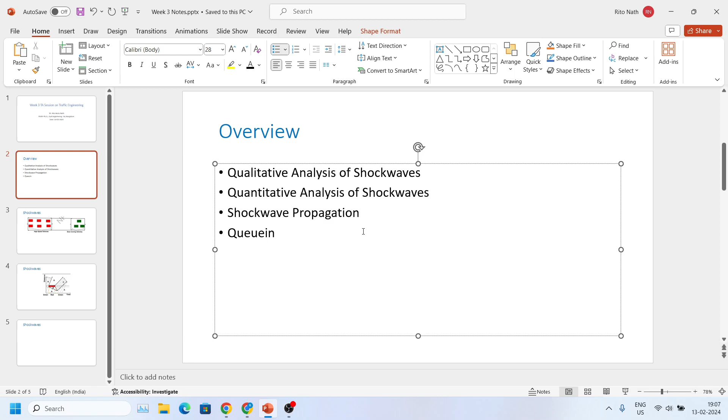So next is queuing analysis, and it can be both deterministic and stochastic. The stochastic version is not discussed in detail, and those things probably aren't required in detail to know, but just an overview is required for those topics.

Let me get started with shockwaves. First we looked at this picture which explains what a shockwave is. There is a stream of high speed vehicles moving behind a stream of slow moving vehicles. After a certain point of time, these high speed vehicles will catch up to the slow moving vehicles, and once that happens there are some states - the slow moving vehicles are in one state and this is another state. Once it catches up to the first traffic stream, a boundary will be created that demarcates some of the time-space properties of these two different states, and this boundary that's created is called a shockwave.

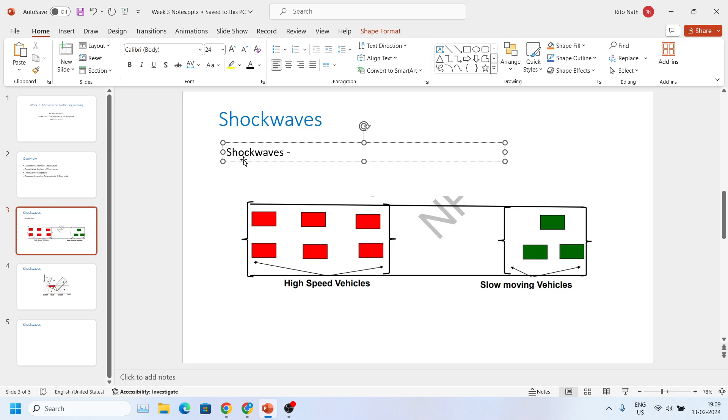So if I have to write briefly about shockwaves in a short sentence - let me increase the font size - shockwaves is nothing but a boundary that demarcates the time-space domain of one flow state from another.

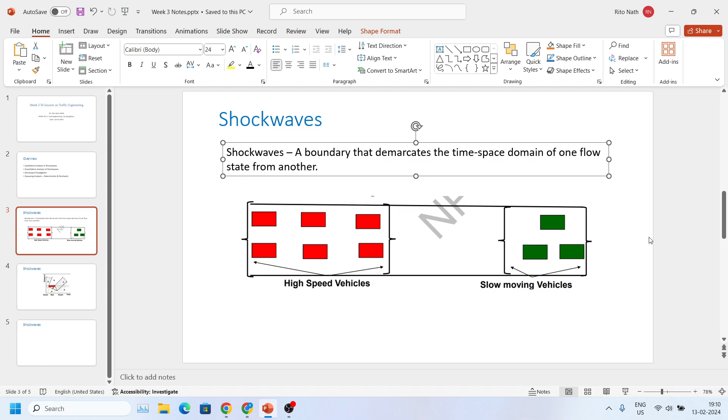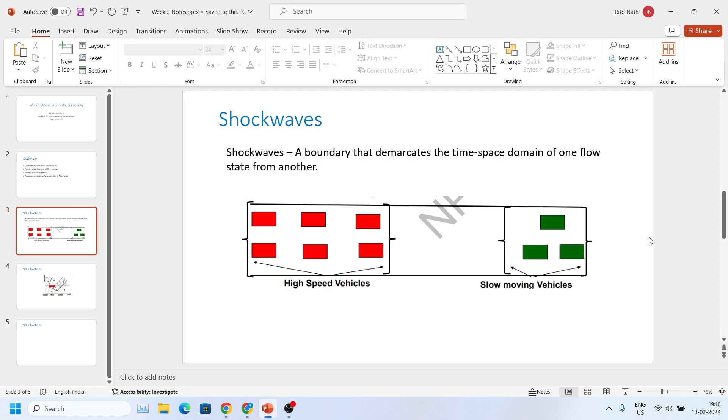This has already been discussed in class, and it's a very basic concept that you should be able to understand. There are some examples also given, like at a signalized intersection, if fast moving vehicles approach a queue, then queue behind those stopped vehicles, multiple shockwaves will be created - we'll see that in the next slide explaining the example discussed in class. So this is about signalized intersections.

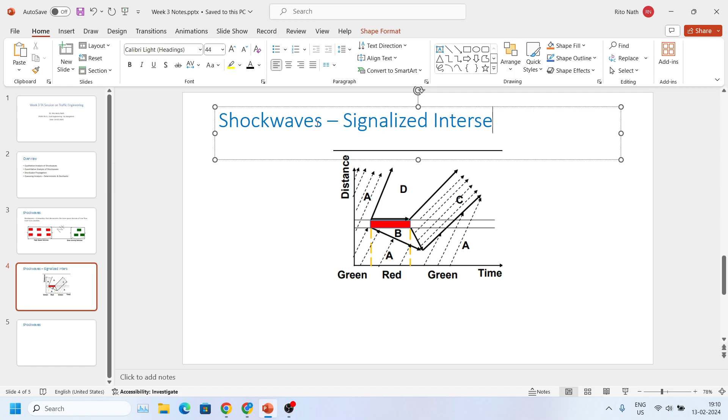Your first assignment problem, I think, is also related to this figure. At a signalized intersection you can have some green time, then your signal will turn red and remain red for a while, then again become green, and so on. In the x-axis time is plotted, and in the y-axis distance is plotted. There are multiple vehicles approaching that signalized intersection, and before it turns red those vehicles can pass through that intersection without any stopping.

But once the signal turns red, the first vehicle at this point, when the red time begins, has to stop there, and then behind that vehicle all the other vehicles will be stopped as well, and they will form a queue.

So that's why there is this boundary, or line, that has been generated, showing these vehicle trajectories as parallel lines. These parallel lines denote that these vehicles are moving at the same speed, and once it comes to a stop, this is the boundary that has been formed. Then after some time the signal turns green again, and the vehicles that approach after this point can pass as if it is the traffic state before the signal turned red.

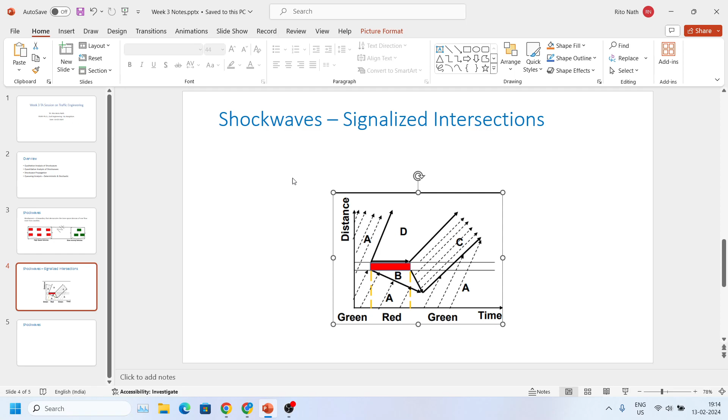Okay, so in this case, how many shockwaves are created? That's, I think, your first assignment question. Let me write it down. How many? So the answer is 6.

Now, what are these shockwaves? If I ask you, how many traffic states are present here? From the figure, you can notice that there are 4 traffic states. One is A, which is before the signal was red, when all these vehicles were moving at the same speed and passing through that intersection. This A traffic state was also prevalent upstream of the signal, and after the signal turned green again, those vehicles also had the same traffic state.

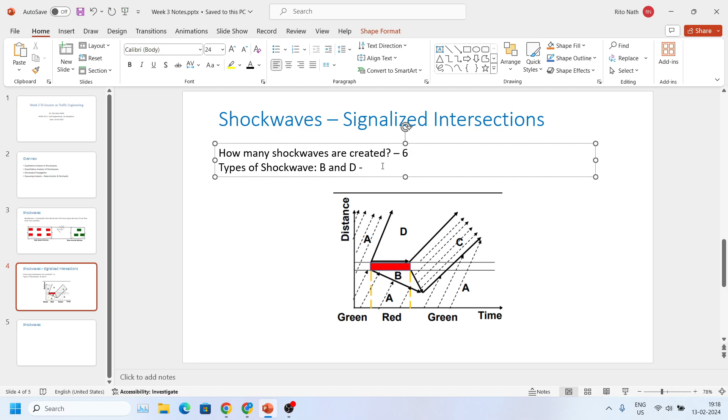Suppose between B and D, what kind of shockwave is created? If you notice here, between B and D, this is the stop line, and this is a horizontal line that you are getting between B and D. So the boundary is like that, and that's why it is called a stationary shockwave, generally called a frontal stationary shockwave.

Then, between flow states, suppose I pick... let me quickly check... so B and A is fine. Here, stationary means that the location of that shockwave is fixed - this is the stop line. Frontal refers to the formation of the shockwave at the downstream, what they call the front end or front edge of the congestion region. That's why it's frontal stationary. Next, there is something between A and B, suppose.

So this they call it a backward forming shock wave. If you notice, the slope of this line is negative. That's one way of checking whether it's backward or forward. It's backward because the queues are propagating upstream over time, in the opposite direction of the flow. And forming refers to the increase of the congested region as more vehicles come to this intersection.

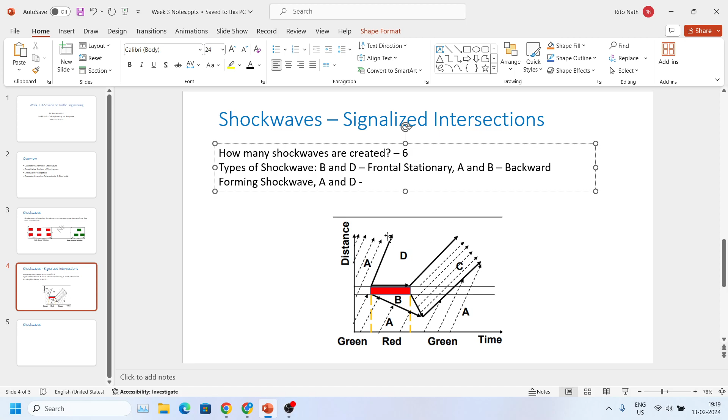So this is another type. Then we have 4 more types of shock waves. Next, between A and D, this is the one we're looking at here, and this they call a forward recovery shock wave.

And this is because forward means the shock waves are propagating in the same direction as the traffic flow, and recovery means the decrease of the congested portion because more vehicles are now getting dissipated.

Similarly, you will get 2 or 3 more shock waves, one between B and C. I'm referring to this line. Again, it denotes something related to backward, right? And this is called the backward recovery shock wave. Similar kind of definition - the dissipation of queue happens and so on. That's why it's a recovery shock wave.

And backward means these shock waves are propagating upstream of this red or the stop point. Then there is something between D and C as well. So I'm looking at this one, and this is called the forward forming shock wave.

So this means that this moves in the same direction of traffic, as you can notice, and as this flow state D has almost 0 vehicles here, the propagation of the shock wave will create some congestion. So that's why they call it forming.

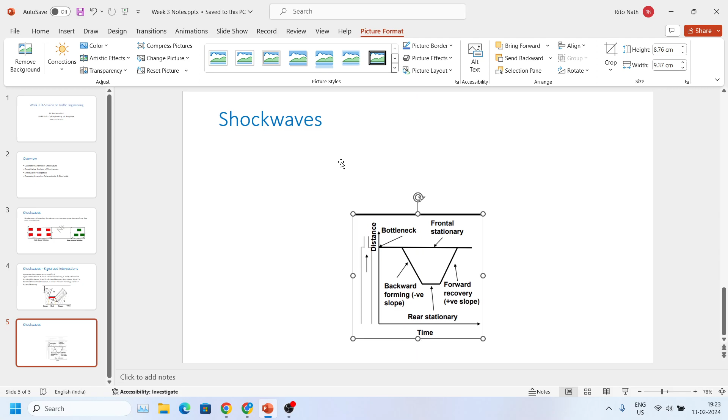Okay, so probably I'll move to that example. I'll just quickly add this figure. So here there's another example that I'll be talking about, related to the lane drop at a bridge.

So here, if you notice this figure, I think it's visible - I'll just increase it. So this is the lane that we're talking about, and it has some capacity. After a certain portion, after you travel some distance, at this point there is some bottleneck and the capacity decreases. So that means congestion will typically increase because of this.

So again we have to see how many flow states are being created, and then discuss how many shock waves will be created in this. So you can think of this as a 3-lane highway that meets a bridge of capacity 2, of 2 lanes. That's why it's called the lane drop at a bridge.

Now this demand pattern can be different during different times of the day. So one flow state will exist in this 2-lane section, and another kind of flow state will exist in this section where there are 3 lanes.

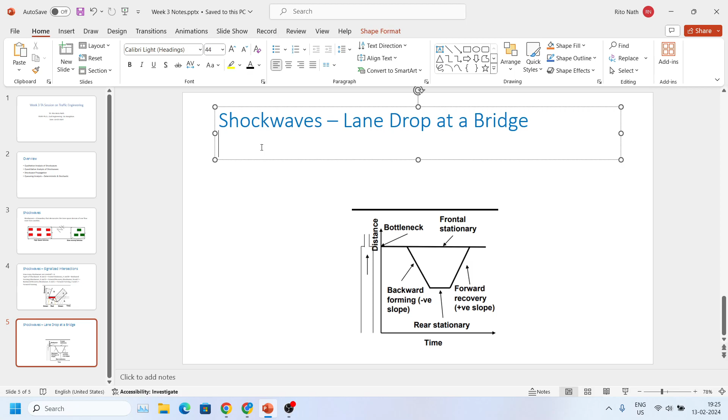Now what happens is that when demand equals the capacity of the bridge, there will be one shock wave that forms, called the frontal stationary shock wave. So here this is at the upstream side of it, and it's stationary because, as I mentioned before, stationary means the location of that shock wave is fixed. Here it will form - so that's one of the shock waves. Let me quickly write it down.

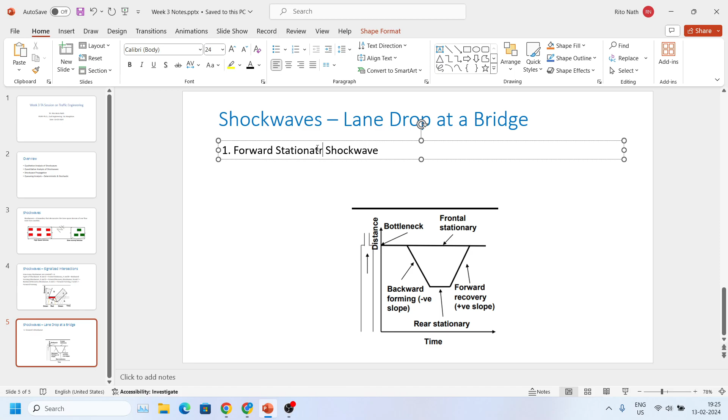So this one is the frontal stationary shockwave - I made a mistake here, this is the straight line that you notice here. Let me correct that, I should write it as frontal stationary, not forward.

After that, if the demand exceeds the capacity of the bridge during peak hours, queues will start to form and propagate backward, creating another flow state which we can call flow state C.

So the flow state in the two lane was A, and in this lane initially it was B. Between A and B you have this shockwave AB, then this is B, and then you'll have another flow state somewhere here which is C. This shows the queue is getting propagated backwards, so that's why you have this negative slope line, which is called the backward forming shockwave.

And then there is another flow state, between this C state and this A state, or you can name it as a different state altogether. That will give you a rear stationary shockwave, and you'll have another shockwave which is the forward recovery, with a positive slope.

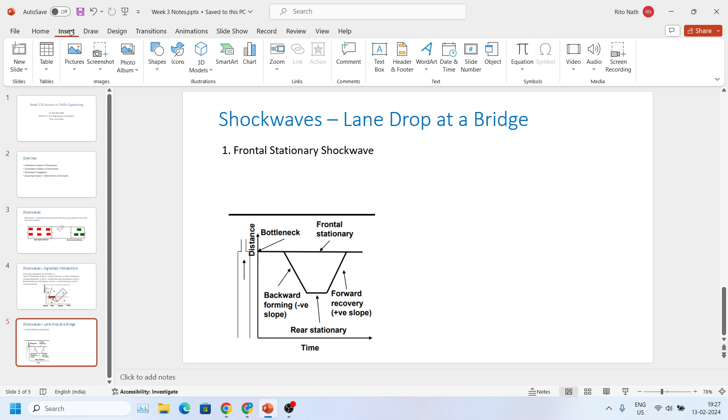Let me add another figure here that will make those namings clearer.

Here you have these symbols written. Between A and B you have this frontal stationary shockwave. Between B and C you have a backward forming, then you have a rear stationary, and then a forward recovery shockwave. So we'll essentially have four kinds of shockwaves in this problem.

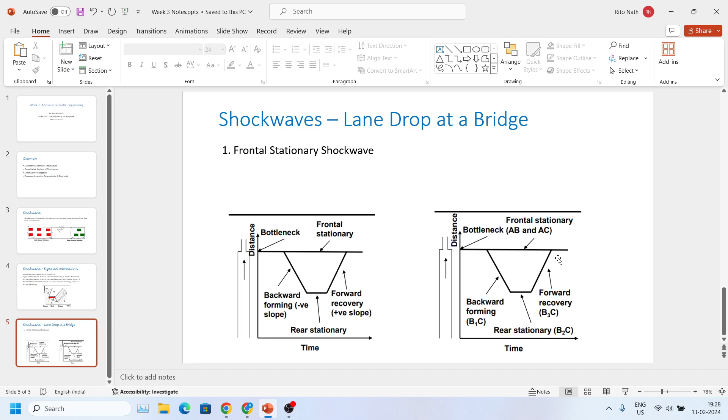Let me quickly write it down: you will have a backward forming shockwave, then a rear stationary, and finally a forward recovery shockwave.

To explain it more, it depends on the demand versus the capacity of the lane or bridge we're looking at. As mentioned, when demand exceeds capacity, you get the backward forming one, and after the demand reduces back to the capacity of the bridge, a stationary shockwave is created at the rear end of the queue - that's the rear stationary shockwave.

If the demand reduces further, the queue starts to reduce and the congestion moves forward, which creates the forward recovery shockwave. Frontal stationary has already been mentioned. So that's all about this example.

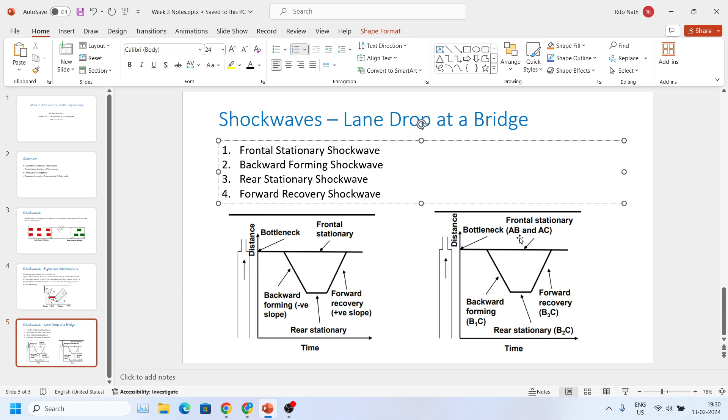Next, we have six types of shockwaves in general. Most of them, four, have been covered here, and there are two more: one is forward forming, and another is backward recovery shockwave. I think I wrote something wrong - this should be forward recovery, not frontal stationary twice. So you can also have backward recovery shockwaves and forward forming shockwaves, giving six kinds of shockwaves total.

I could go into more explanation of this classification, but it shouldn't be too difficult to understand with these two types of examples, both discussed in class. If anyone has questions, ask me now, otherwise I'll move to the next part, the quantitative analysis of shockwaves.

Okay, let's start the discussion. Let's add a figure and try to explain it, starting with this figure.

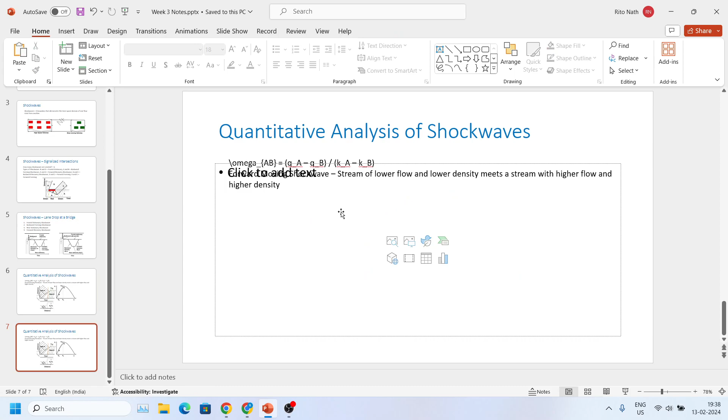So that's when there is a forward moving shockwave created. Then a stationary shockwave will be created if this line is a horizontal line. Let me add another figure, this one. So here the slope of the line is 0, or you can have another point C which gives you a slope of the line as negative. So there are two other kinds of shockwaves.

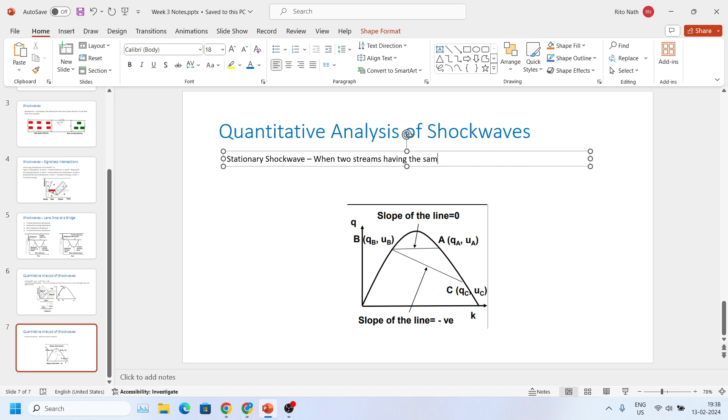One is the stationary shockwave, which tells you that when two streams having the same flow value but different densities meet. So here the flows are equal, QA and QB are equal, but the densities KB and KA are different. This is a stationary shockwave, and by looking at the slope of the line, if it is 0, it's a stationary shockwave.

Then you have backward moving shockwave. This happens when a stream with higher flow, this is point QB, and lower density, because with respect to point C you are looking, meets another stream with lower flow and higher density. If you look at the picture it will be clear. So you don't have to remember all those things, just look at the picture, construct these lines, and you will know the answer.

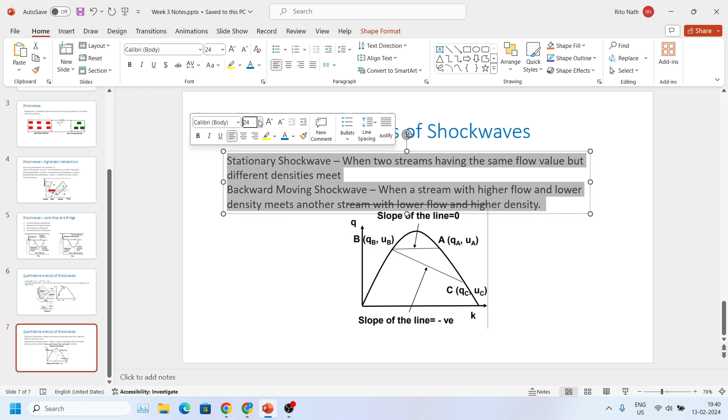Okay, so before I go into the examples and mathematics, the problems, does anyone have any doubts here?

Okay, so maybe I can now start looking at some of the assignment problems quickly. Let me check if something is relevant to this topic. I think the first two, even first three problems are kind of related, and these I have discussed, so let's quickly discuss some of those problems.

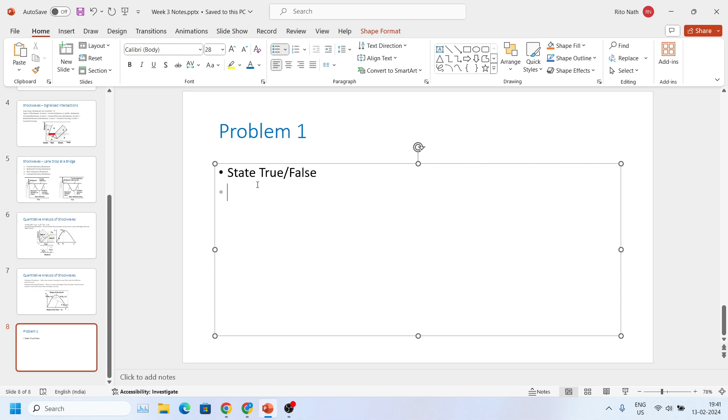Let's look at problem 1. It says state true or false. So let's look at the first one: total 6 shock waves are created at a signalized intersection. This we have already discussed, and this is obviously true.

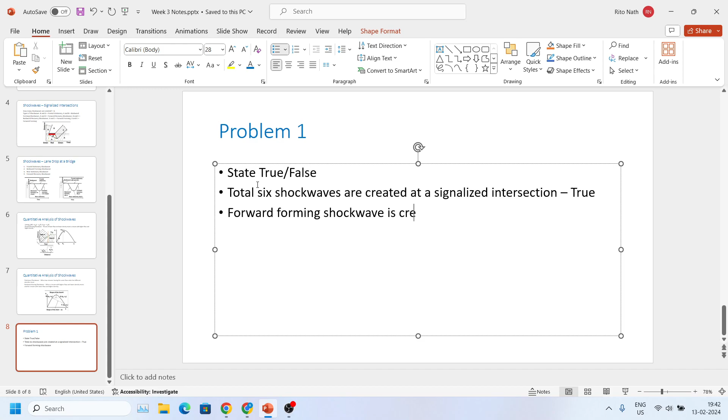Does anyone have a question? Next: forward forming shock wave is created when the demand is equal to the flow of the congested region. Is it true or false? You can look at this example. Here I had already discussed, when demand is equal to the capacity, a forward forming shock wave, is it created or something else is being created here?

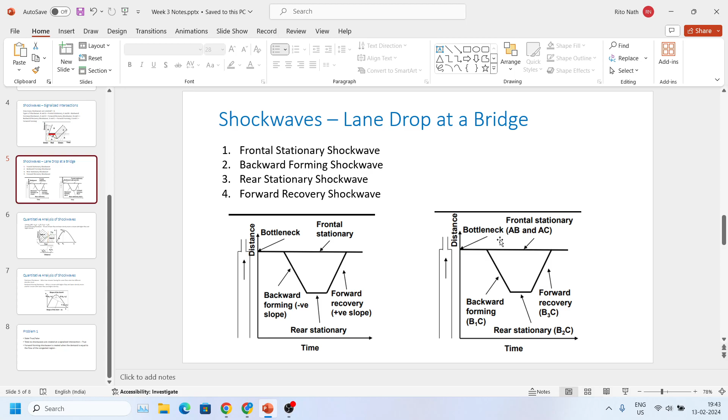Obviously the statement won't be true, because the congestion won't be moving in this direction where the traffic is moving. In that case, where the demand is exactly equal to the flow in the congested region, it will kind of first form a frontal stationary kind of bottleneck. So this won't be correct.

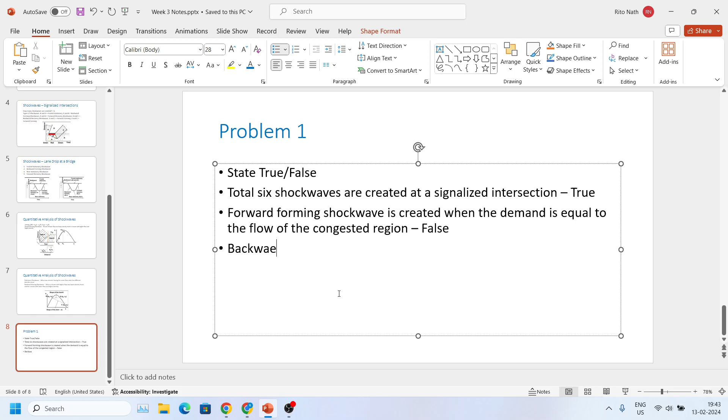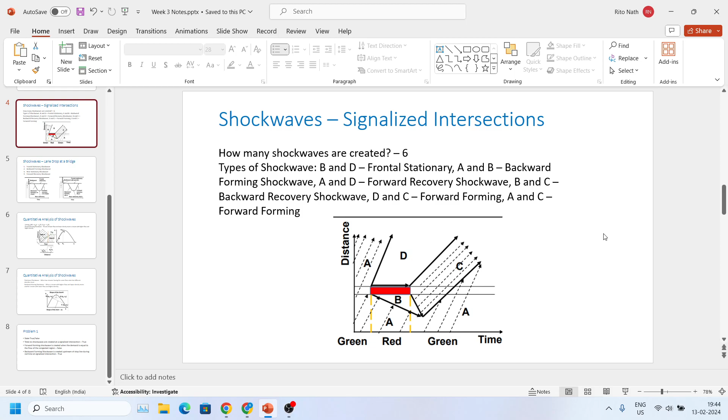Let me check. Next, you can have: backward forming shockwave is created upstream of the stop line during red time at a signalized intersection. So if you look at this figure, upstream means, yeah, looking at this, this is true. Here backward forming shockwave was between A and B, so this is the one we are talking about.

Finally you can have the definition of shockwave, which I'm not writing down again. Let's look at another one: backward moving shockwaves will occur when a stream of higher density and higher flow meets with a stream of lower density and lower flow. Is it true or false? We just had the discussion on this.

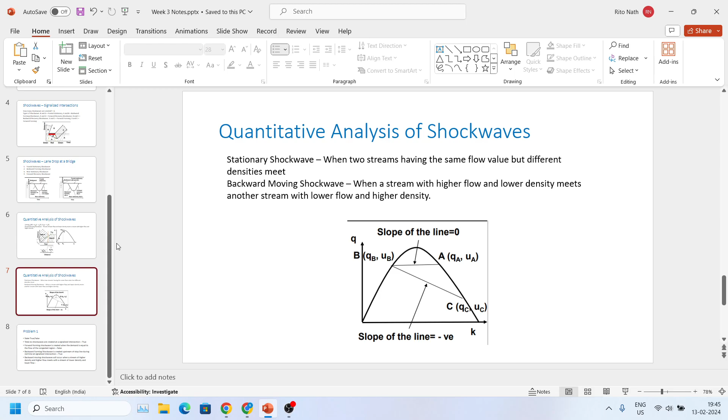You can look at this figure. So we're looking at backward moving ones, but in the example what has been told is higher density and higher flow meets lower density and lower flow. Here what happens is this - they are talking about this one, but this is not a backward moving shockwave, so this will obviously be false.

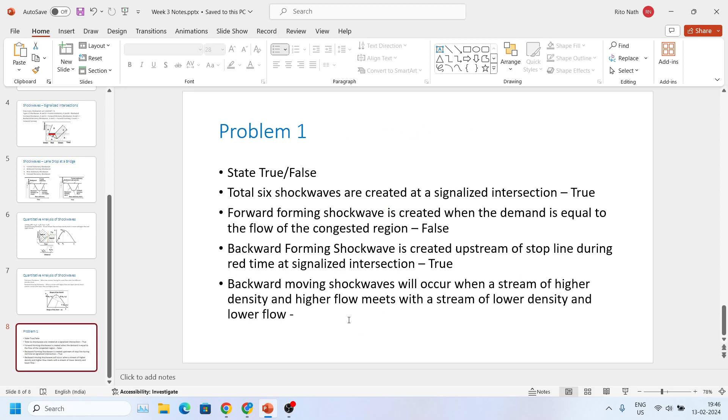Then: stationary shockwaves are created. If no one has a question, can you mute yourself? I think there is some background noise. Okay, I think I'll just mute all.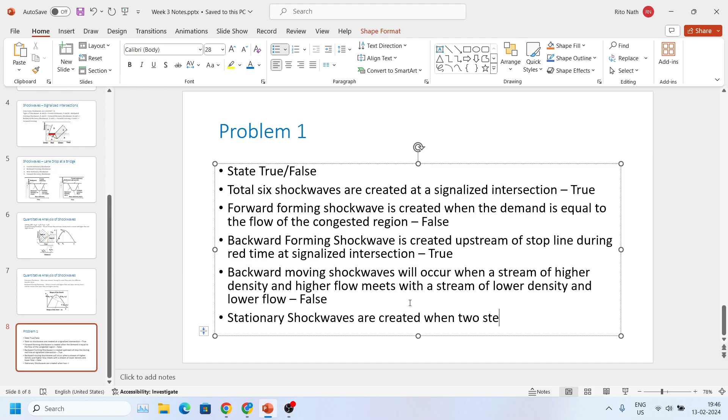So it will happen when two streams of same flow but different densities meet, and this is true. We just had the discussion.

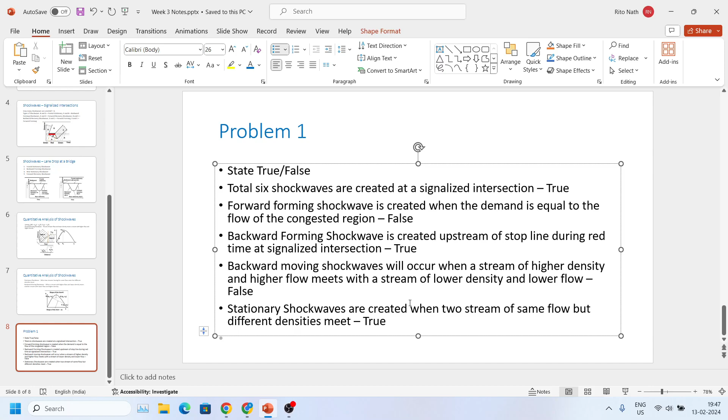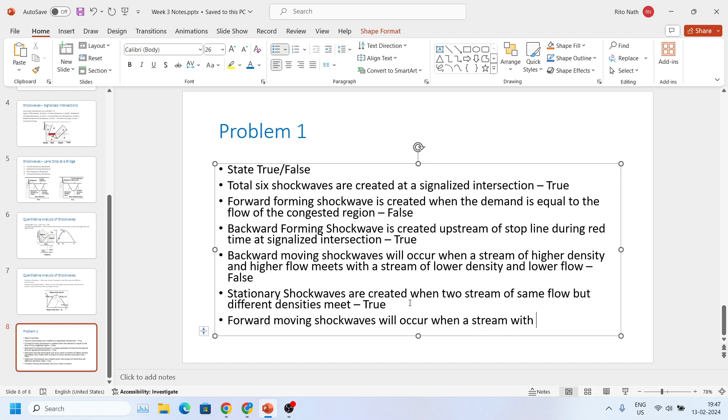Then something about the forward moving shockwave. Let's quickly discuss this. Forward moving shockwaves will occur when a stream with higher flow and lower density meets a stream with lower flow and higher density. So this is higher flow and lower density.

Let's look at this figure. Higher flow and lower density, it will be around here, and then lower flow and higher density. So again the slope will be negative in that case, but it is not a forward moving shockwave in this case, so this will be false. Does anyone have any doubt with all this true/false? If not, I'll move to the next problem.

Okay, so it is related to the speed of the shock waves, and also something related to the number of vehicles in the platoon. I think the problem is related to the signalized intersection, if I'm not wrong, let me quickly check. Okay, so let's maybe go back and discuss something related to the theory, and then I'll explain the problem. Let's quickly discuss the other topic.

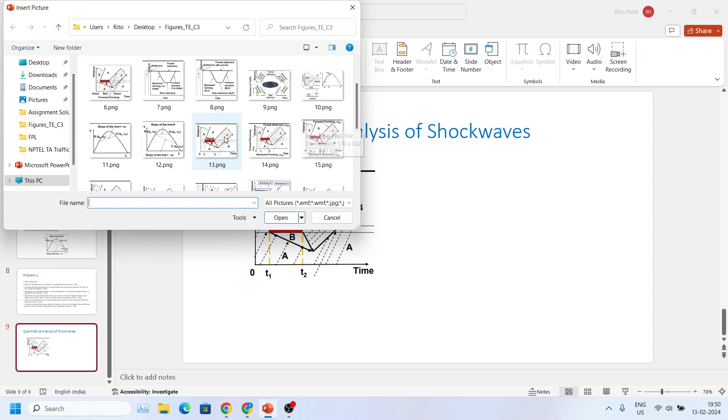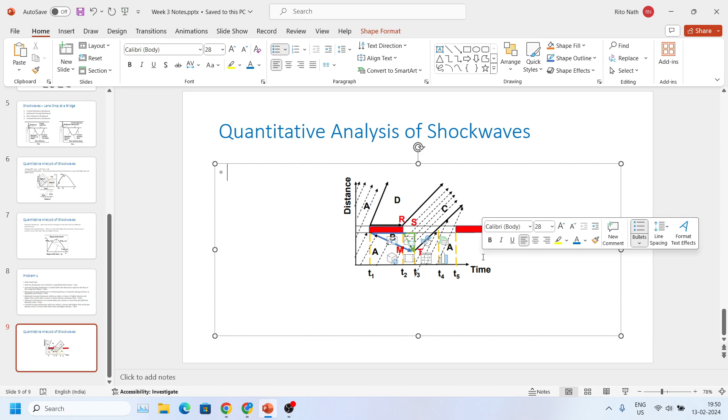Let's look at this example now. This we have already seen. Does anyone have a question? You can unmute and ask me if you have any doubts. Let's actually look at this figure. Let me delete this - sorry, trying to delete it.

And then let's insert another figure, something related to this. So the first example is very similar - we have already discussed it. So this is the red time, and then you have the signal turning green, and then you again have the red time, and based on this you can have some problems. You already know that 6 shock waves are created here. I'm not going into the derivation - this has been discussed in the class. If any question comes up, you can directly use the formula and get the answer.

So from here a heavy truck might enter this two-lane highway, and initially the traffic stream was having a very high speed, but once this truck enters here, it enters with a low speed, and then the other vehicles behind this truck get stuck behind this slow moving truck. After some time this truck exits from the off ramp, and then the traffic state kind of returns after a certain point of time.

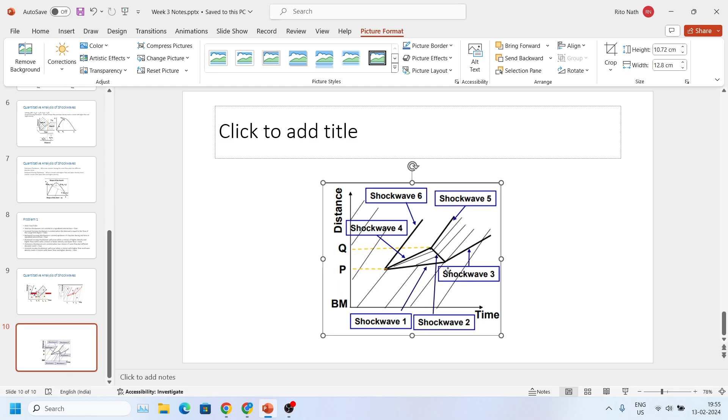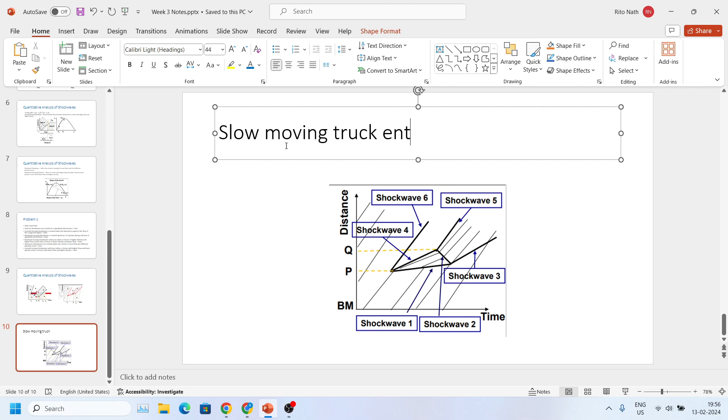So here I'll just add this figure. So in this case again...

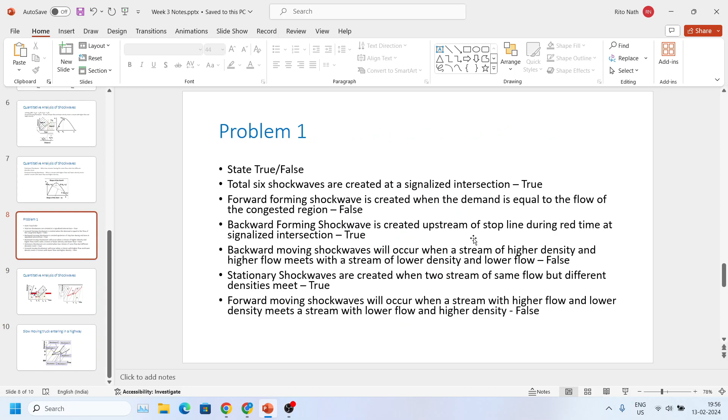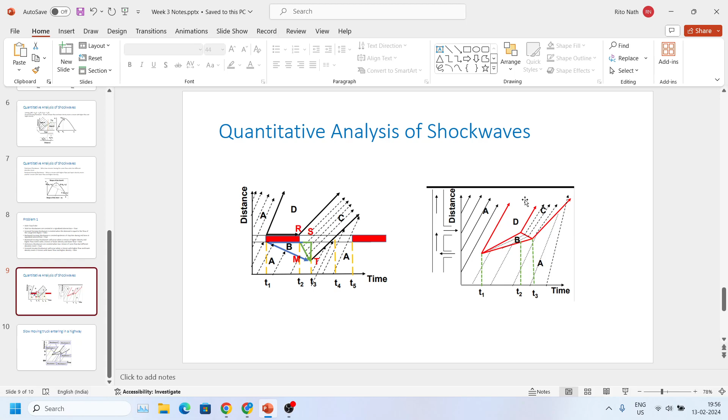Now, as mentioned in the previous slide, the number of traffic states present here is 4, and similar to the signalized intersection, you will have 6 shock waves being created, and those 6 shock waves are denoted here.

So now you can have data related to, say, shock wave 1. You can have the flow, density, speed values for this traffic state, say A or whatever was marked in the previous figure. And if I ask you to calculate the speed of the shock wave, it's very simple: QB minus QA divided by KB minus KA.

Then you may be asked about the starting point of the platoon forming, or the starting point of the platoon dissipating shock waves, so those you can also calculate. This point P is the starting point of the platoon, and this point Q is where the platoon gets dissipated. Finally, you might be asked about the ending points of the platoon forming and dissipating shock waves, so then you have to check where the shock waves meet. It's this point they are talking about.

And you can also calculate the maximum length of the platoon depending on the speed and time, and then you can calculate the flows and the number of vehicles and so on. So let me see what was the question in the assignment.

Yeah, so let me write it down in the next slide and solve it. So this is problem 2. This tells you again of some two-lane undivided highway, and the traffic volume is given.

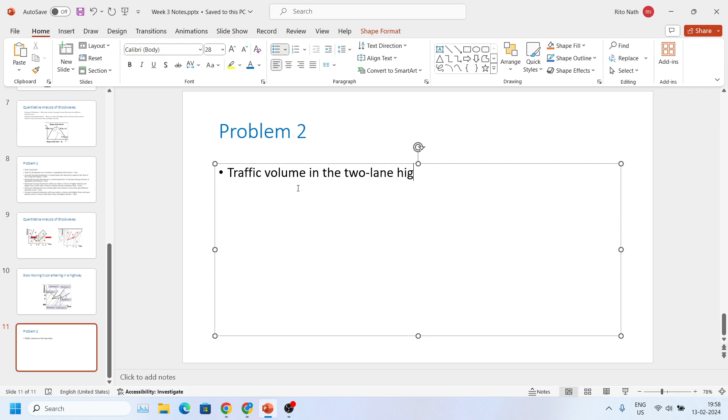So this equals 2000 vehicles per hour. Then there is this truck entering the highway, but before that you are given the density value as well, which is 25 vehicles per kilometer. The truck enters the traffic stream and travels at a truck speed of 10 kilometers per hour.

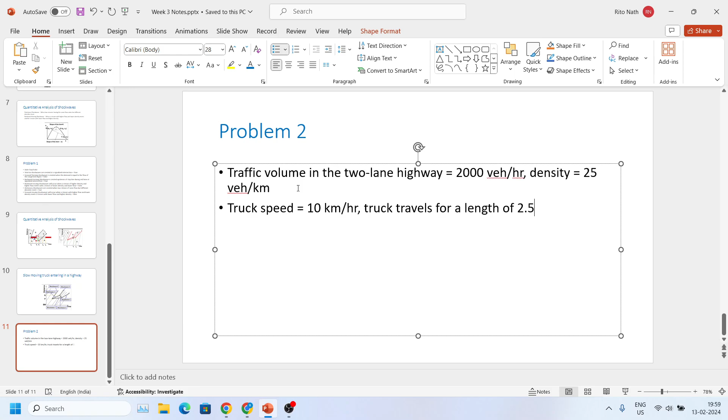And the truck travels for a length of 2.5 kilometers before it goes through that off ramp. Now let's calculate the speed of the traffic, the original traffic stream.

The speed is nothing but flow divided by density, which is 2000 by 25, and that gives you 80 kilometers per hour. You can see that the truck speed is considerably slower than the original traffic stream, and the platoon is formed because of that.

The platoon density is given as 100 vehicles per kilometer, and the flow rate is also given. Because of this, the flow rate becomes 1000 vehicles per hour. So now you are asked about the speed of the shock wave.

Find the speed of the shock wave generated because of the entering of the truck into the traffic stream. So how would you approach this problem?

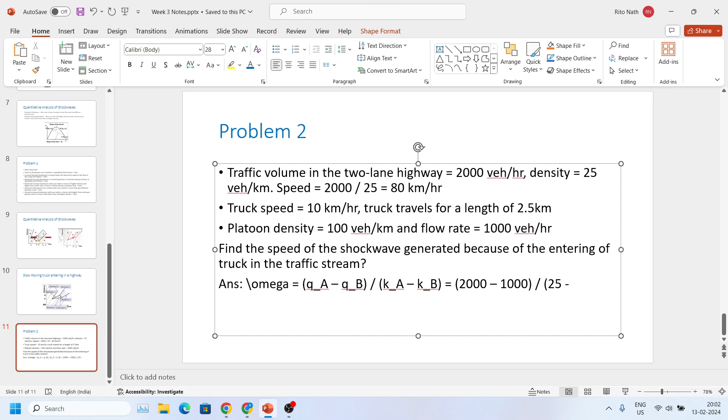This gives you 1000 by 75, which is around 13.33, but with a negative sign. The sign indicates it's a backward moving shock wave.

So you can have this kind of a simple problem that you can solve. Now it may also be asked about the number of vehicles in the platoon by the time the truck leaves the highway.

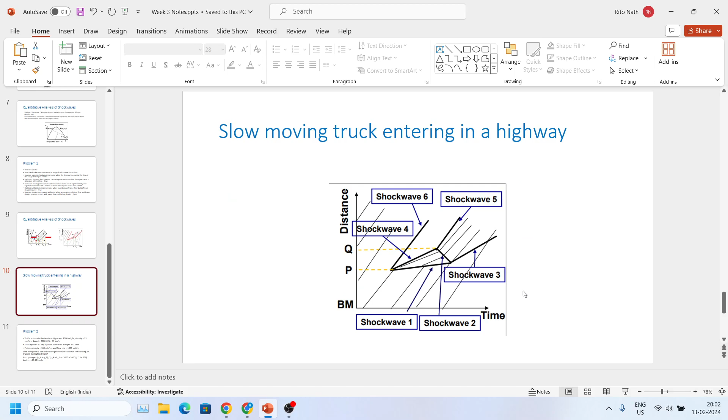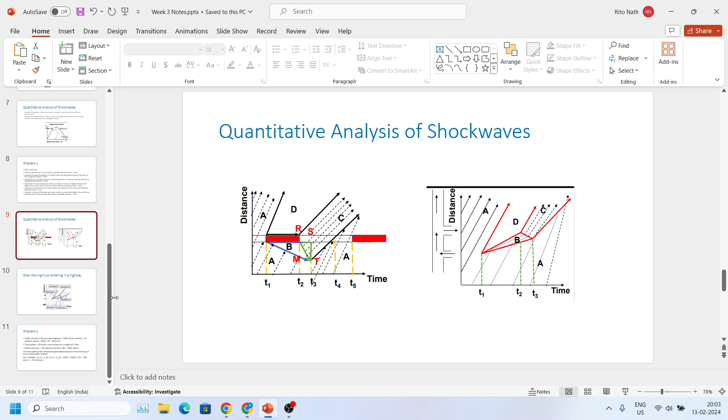Let's see this figure. This is the point where the truck leaves the highway, T2. At that point you may be asked to calculate the number of vehicles in the platoon. Let's start a new slide.

The data remains the same, and you are now asked to find the number of vehicles in the platoon by the time the truck leaves the highway.

Here, first you have to find the rate at which the platoon grows with respect to the shock wave. You know the shock wave speed, omega, which was minus 13.33 kilometers per hour. Then you have to find the platoon speed.

That's again flow rate by density, which gives you 10, which is also the truck speed. So the platoon will grow at a rate of 10 minus minus 13.33, so it will be plus, giving you 23.33 kilometers per hour.

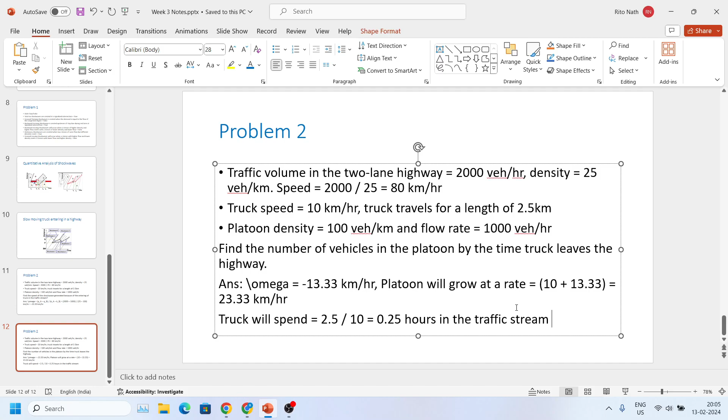Now it's simple. You have the speed at which the platoon grows and the time the truck was in the platoon, so you can calculate the length of the platoon by multiplying those two: 23.33 times 0.25 kilometers, which gives you around 5.83 kilometers.

Finally, you have to find the number of vehicles in the platoon. You have the length of the platoon and the density, so you multiply those two: 5.83 kilometers times 100 vehicles per kilometer, which gives 583 vehicles.

So that's how you solve such problems. Does anyone have any doubt related to this? Otherwise, I'll move to another discussion. If not, I'll probably discuss the remaining portions of shock waves and then move to queuing.

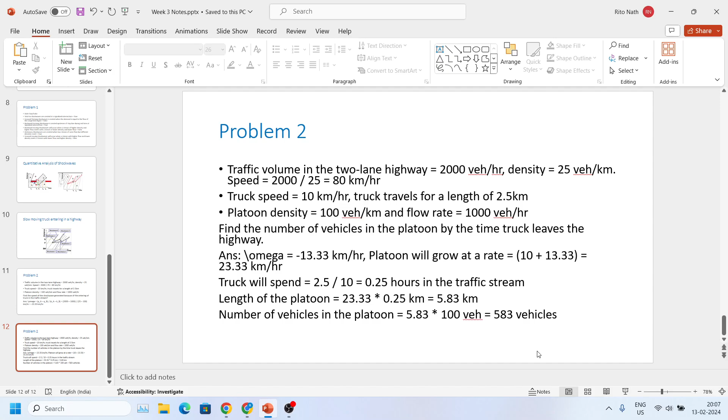Shock wave propagation, the Greenshields model and everything was discussed in class, but I didn't find many questions related to that in the assignments. So you can go through those, and now let's move to queuing. I'll start a new slide.

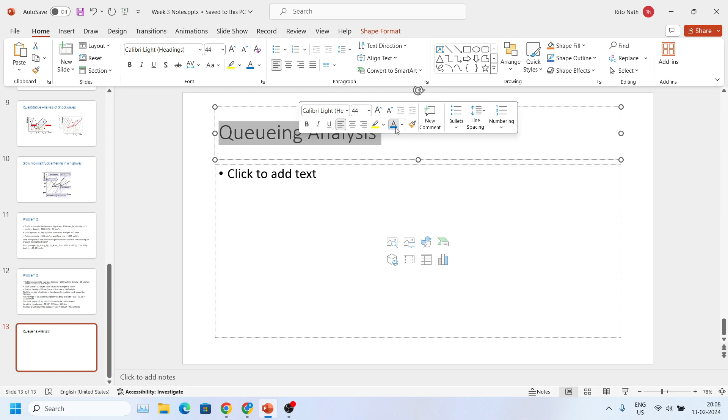Okay, so what do you mean by queuing? If I ask you, what is actually queuing and how does it form or happen?

Okay, let me write down some key points. It's traffic congestion that leads to queuing. This can happen because of on ramps, off ramps, signalized intersections, and unsignalized intersections, and so on.

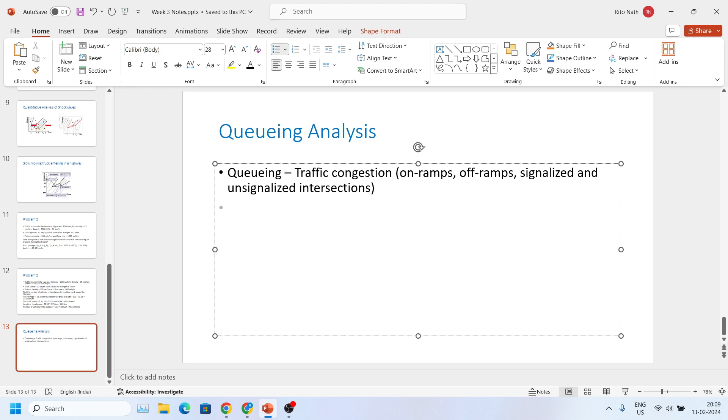It might be time dependent as well, not only space. Like in peak periods, you may have considerable amount of delay, so delays during peak periods.

So if we look at it, there are some terms defined in the class. One is traffic demand. This is related to how many vehicles are willing to pass a point on the road in, say, one hour. The unit is vehicles per hour - number of vehicles that desire to pass a point in the road in an hour.

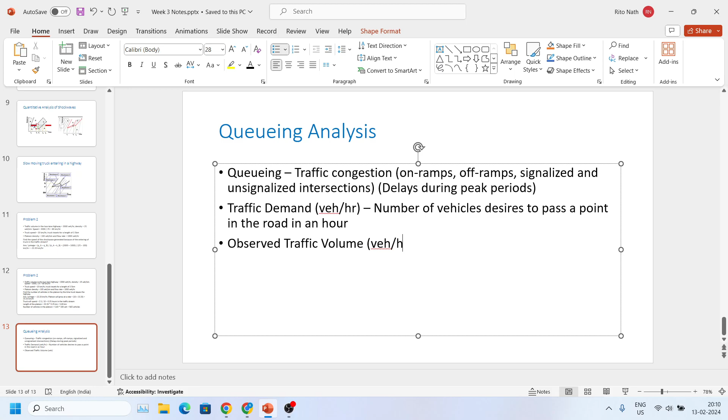Then you have observed traffic volume. This is different from demand because this is actually what you count - the number of vehicles that actually passes a point on the road in an hour.

And finally you have the traffic capacity. This is in vehicles per hour again, and you already know the definition - the maximum volume that a particular point or segment of a facility can accommodate.

Okay, so now there are some relations. If the traffic demand is less than the capacity, then observed volume will obviously be equal to the traffic demand. Now if the traffic demand is greater than the capacity, observed volume on the road will be less than the actual demand, and there are some challenges in measuring that.

So when that happens, we know that congestion is present, so drivers might switch to alternate routes or may travel at a different time during the day. He or she might even cancel the trip. So all those effects will be there, and there will be some part that can be measured and some part that you won't be able to measure.

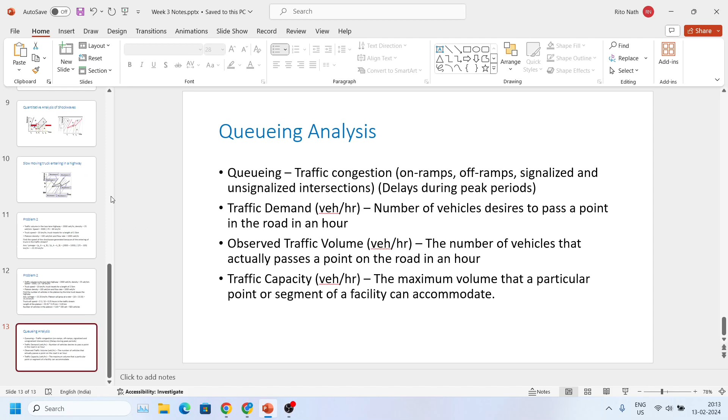Okay, so let's discuss this problem. This is on the relationship between traffic demand, volume and capacity. Let me add a figure. So the one that is important here is this one.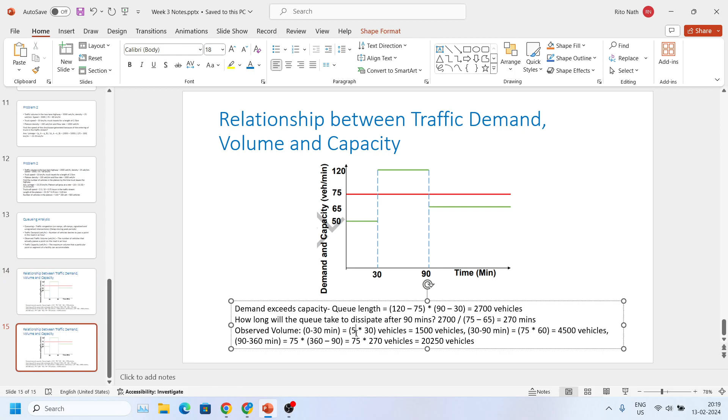I think a similar problem was there in the assignment, so let me quickly check that. What was the problem? Yeah, there was a slightly different curve in the assignment. Let me delete this and let's look at the assignment problem. So in the assignment you have this figure.

If you look at this figure, 1500 is the capacity, denoted by green, and this is the demand till 1 hour. Then you have a different demand from 1 to 1.5 hours, then it remains constant, then it drops to this point, again drops and remains constant. So you have 6 hours of data.

Now if I ask you: determine the length of the queue dissipated at t equals 3.5 hours. So this is the first question. Now how would you answer this?

So till 3.5 hours, here there is some decrease happening. There was an excess demand and those you have to pass through as well. So demand rate is decreasing. Here it was 1800 at 2.5 hours and 1000 at 3.5 hours. So in 1 hour the decrease was 800 vehicles.

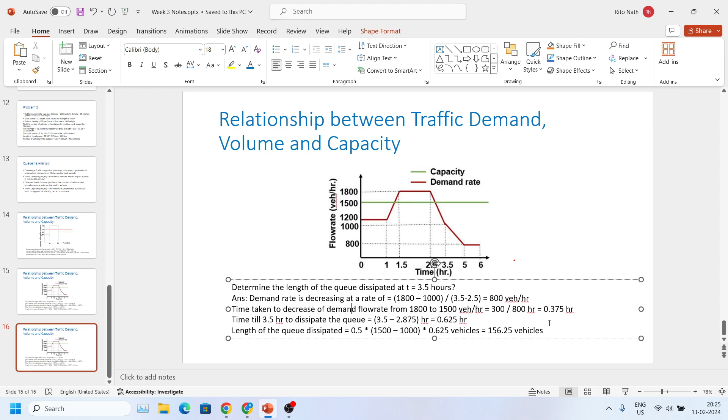So then you may be asked about, let's try another problem with the same data but a different question: determine the size of the queue developing during the period when demand is greater than capacity.

So again, it's very similar. It's this area of this portion that you have to find out - these triangles, the area of the rectangle, or you can directly get the area of this trapezium, but for that you need the data where this red line intersects with the green lines.

So in a similar approach we'll solve this. Demand rate is increasing between 1 and 1.5 hours, so the rate of increase equals 1800 minus 1200 divided by 1.5 minus 1. This gives 1200 vehicles per hour.

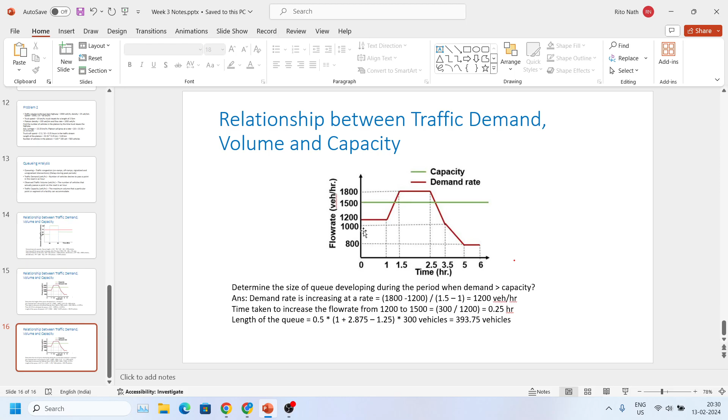Okay, so next, I think in queuing analysis, if I go back to the class material, let's look at another example problem, this one. I'm not going to solve the problem as such, but let's look at the concept here. So here what you have is these merge points - this is approach 1 and approach 2, and they are getting merged together here.

Now in approach 1 you have the capacity as 4000 vehicles per hour. Your demand is lesser than that, so it can accommodate all that demand, and the observed volume will be equal to the demand. Similarly, in approach 2, the capacity is 4000 and demand is lesser, 3600, and the observed volume will be exactly the same since it can accommodate that demand.

But once you merge here, your capacity is not exactly like 4000 plus 4000 - it's not 8000, it's something less, which is 6000. The number of vehicles intending to enter this merged point is 3600 plus 3800, which is 7400, and the observed volume will be equal to the capacity in this case, because it cannot accommodate the excess demand. So a queue will be formed here, starting at the merge point and propagating upstream, at a rate of 1400 vehicles per hour, which is the difference between the demand and the observed volume.

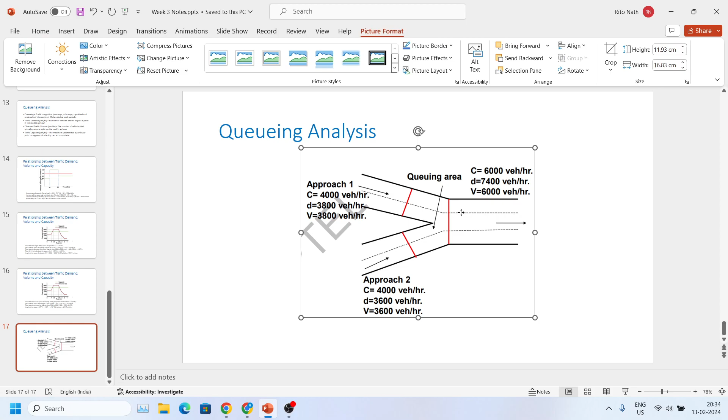And it was noticed that once you identify a bottleneck, it might happen that you're facing another bottleneck, so another section might also be having the bottleneck. So the bottleneck location is not fixed, but you also have some hidden bottlenecks as well. So maybe I'll just add another figure and explain it. Okay, so here you have - yeah, this is the one that I'm talking about.

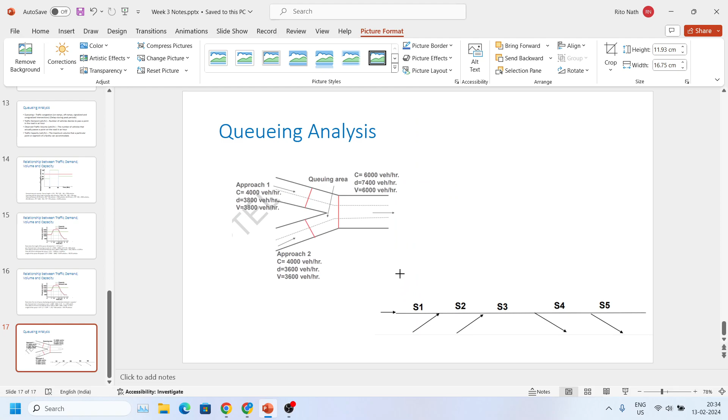In this example, this is the traffic stream moving in this direction. You have two on ramps and two off ramps, and you have sections S1, S2, S3, S4 and S5. Each section has some demand and some capacity, and the portion where demand exceeds capacity is identified as the bottleneck.

In the example in class, I think section 3 was a bottleneck, but once you have excess demand, your actual observed volume will equal the capacity, and later in this portion you won't see any bottleneck. But once you remove this bottleneck, more vehicles can enter here, and this section can also have bottlenecks. So you have to identify those things. One example was worked out in class, and I'm not going into that example right now because it will take a lot of time, but if you have doubts, you can ask me right now.

Otherwise I'll look at a different problem. In the final lecture, only deterministic and stochastic queuing was discussed. If anyone has any doubt, you can ask, otherwise I'll look at the remaining problems in the assignment.

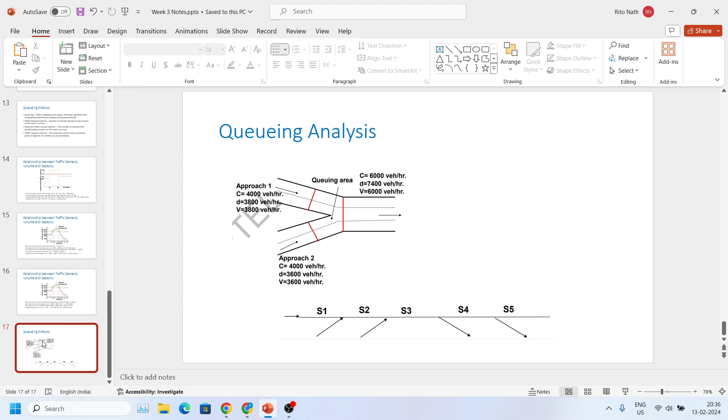Now we'll look again at a signalized intersection and some queuing analysis. So let me look at this.

So this is the problem data given to you. The problem checks for a single lane approach to a signalized intersection where effective green and red times are given. This is where the green phase begins, and it stays till 60 seconds. So your effective green time is 30 seconds, and then you have the horizontal portion that gives the effective red time, which is again 30 seconds.

The arrival rate of vehicles on this approach is given, and the saturation flow rate is also given. You have to assume that at t equals 0 the signal was turned red, and then find the average delay for arriving vehicles within one complete cycle. That one complete cycle, I think, stays till 60 seconds.

Let me write down the data for this problem: effective green time is 30 seconds, effective red time is 30 seconds, arrival rate of vehicles is 360 vehicles per hour, and saturation flow rate is 1440 vehicles per hour per green time.

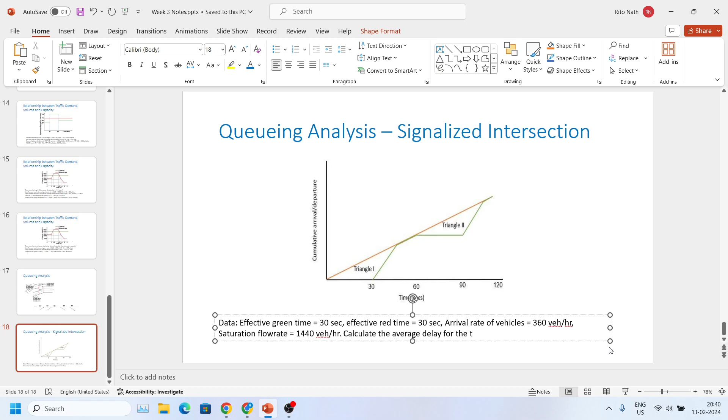Okay, let's calculate the average delay for the arriving vehicles within one complete cycle.

You can look at this portion - this is one cycle till 60 seconds - or you can look at the other portion from 60 to 120 seconds, it's the same kind of plot, it repeats. So the cycle length is 60 seconds here, and what you're asked to find is the average delay for arriving vehicles within this 60-second cycle length.

Now for this, what you have to check first is that the arrival rate of vehicles is given as 360 vehicles per hour. From here you can calculate the number of arrivals within a cycle, within 1 minute, and that would be 360 divided by 60 minutes, which is 6. Let me write this down in the next slide.

So the data was given in the previous slide. Number of vehicles arriving in a cycle: the arrival rate is 360 vehicles per hour, and you check for 1 minute or 60 seconds, so 360 divided by 60... this gives 6 vehicles.

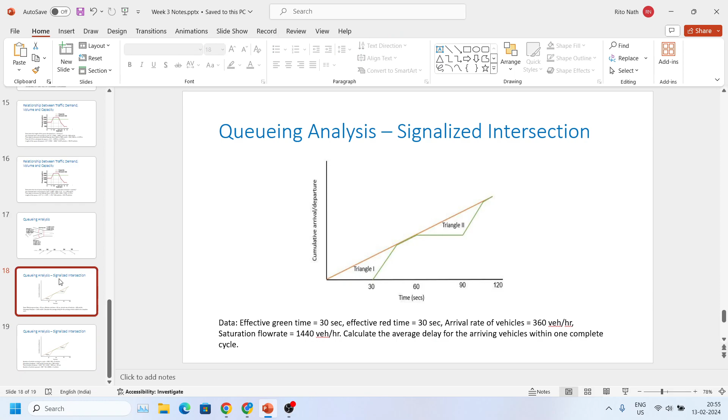So if I'm asking you to calculate the average delay of the arriving vehicles, it would be average delay: 0.5 times 30 times 4, let me just check if I'm doing it correct. This gives you the total delay of all the arriving vehicles. If you divide it by 6, you get the average delay, which is 60 by 6, that is 10 seconds. So this will be your answer.

Yeah, it took a while to solve it, it was kind of confusing from the lecture, but anyway, this is there. Hopefully you will be able to follow it. Just go through the lectures once, use the formulas that are written there, and you can calculate it for any problem.

So we're almost close to 9 p.m. The rest of the problems were, I think, again related to these accept-reject statements, something related to a bridge with capacity 2 lanes. This is discussed already. Traffic demand and observed traffic volume in absence of congestion, this is also discussed. Demand starvation and hidden bottlenecks is also part of the discussion in queuing, which I didn't discuss fully, but it's present in the slides. I think you can go through it.